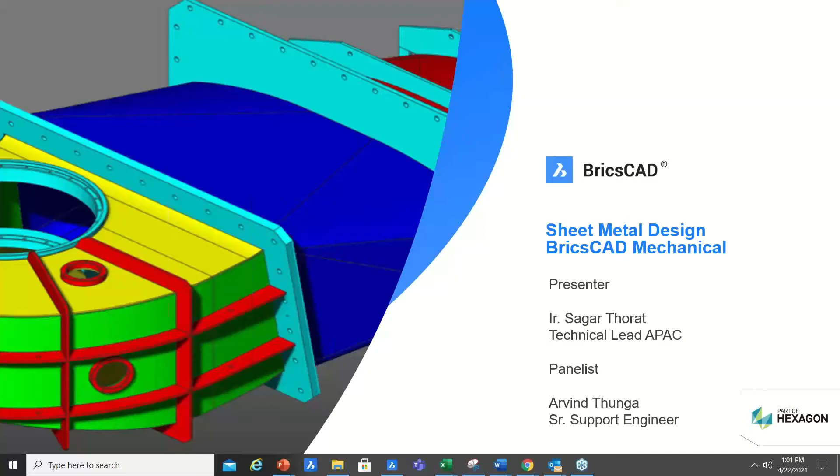To begin with, this is in general the agenda for BricsCAD Mechanical, and our topic today would be sheet metal design, and we would just take a quick look at how sheet metal design fits into the entire mechanical workflow.

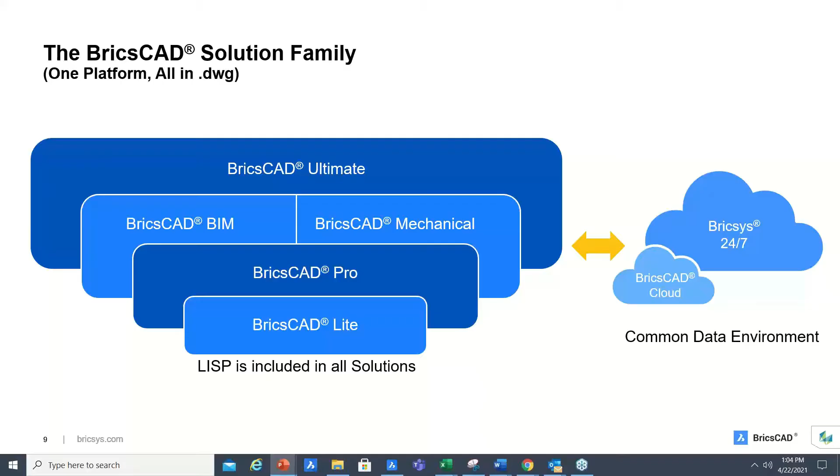The BricsCAD solution family starts from the basics of 2D and takes you all the way to BricsCAD Ultimate, which is a fully functional vertical solution for AEC and manufacturing industries. And today our topic will be BricsCAD Pro and Mechanical combined for sheet metal design.

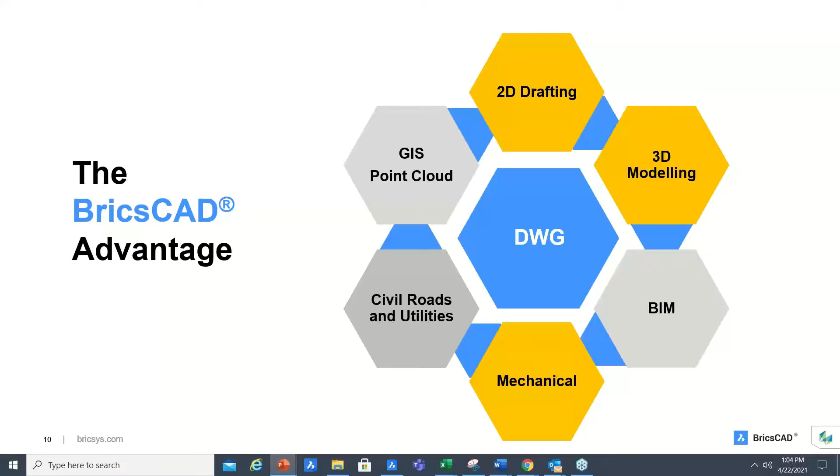What is the BricsCAD advantage? BricsCAD offers you a one-stop solution for all your design needs, starting from 2D drafting, 3D modeling, and mechanical design. Our manufacturing solutions for product design and manufacturers are part of an entire ecosystem which facilitates industry collaboration and high-level design functionalities for manufacturing and mechanical industries.

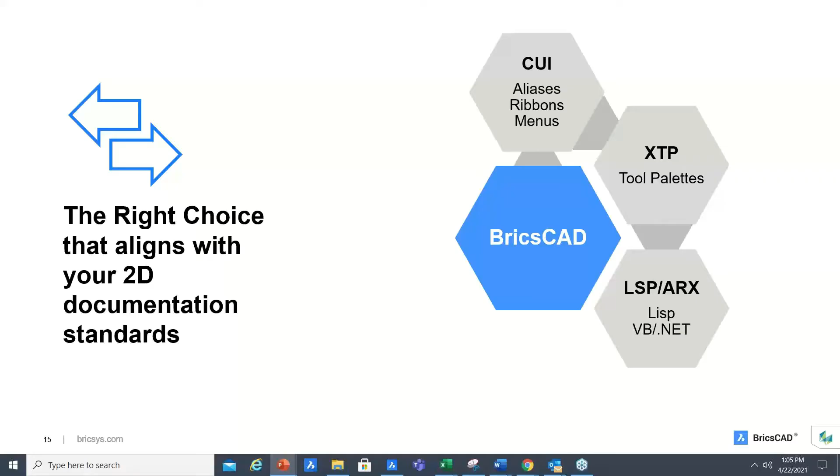BricsCAD is the right choice that aligns with your 2D drawing and documentation standards. Over the years you have developed your CUIs, XTP files, Lisp routines, ARX routines, VB.NET scripts, your sheet sets, DWG, DWT files, plotter setups; all that you know on your current DWG platform can be directly utilized inside BricsCAD.

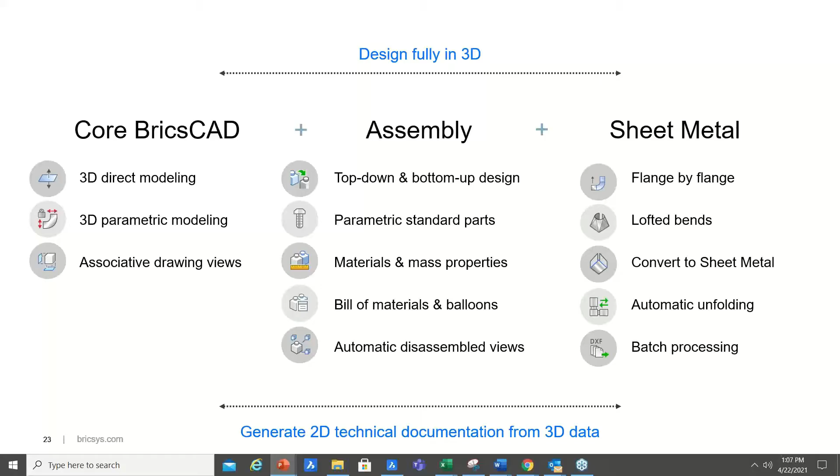So design fully in 3D using BricsCAD and generate 2D technical documentation from 3D data. Create sheet metal part designs that are resilient. BricsCAD is free of the conceptual errors that plague history-based MCAD modeling systems. Your designs can be modified without the worry of failure because we combine the freedom of direct modeling with the power of feature-based design.

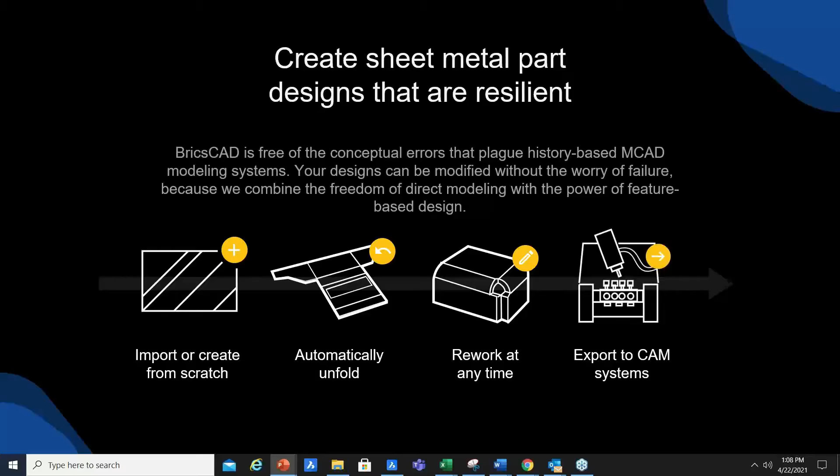So we will begin today and explain to you in the software how you can start creating a very simple sheet metal from scratch, doing automatic unfolding and exporting it to DXF. Some of the features we'll be discussing are analytical unfolding, automatic junctions, bevels, tabs, thickness per body, tabs on curve, and bend radius. These are some of the features that have been launched in the V21 version of BricsCAD. So I would directly like to take you to the software interface now.

So this is BricsCAD. Users who are used to a CAD-based environment would be easily able to adapt to BricsCAD, as BricsCAD saves everything in DWG format, right from the 2000 version all the way to the 18 and the 20 versions.

And BricsCAD also imports multiple file formats and models right from DWG to Rhino, SketchUp, IGS, STEP files, SolidWorks, Parasolid, Creo, Inventor. Files can directly be opened inside BricsCAD for further modification and design.

And you can also export your models as Collada, stereolithography for 3D printing, SVG, IGS, STEP, CATIA, IFC, and of course DWG and DXF is a standard save as.

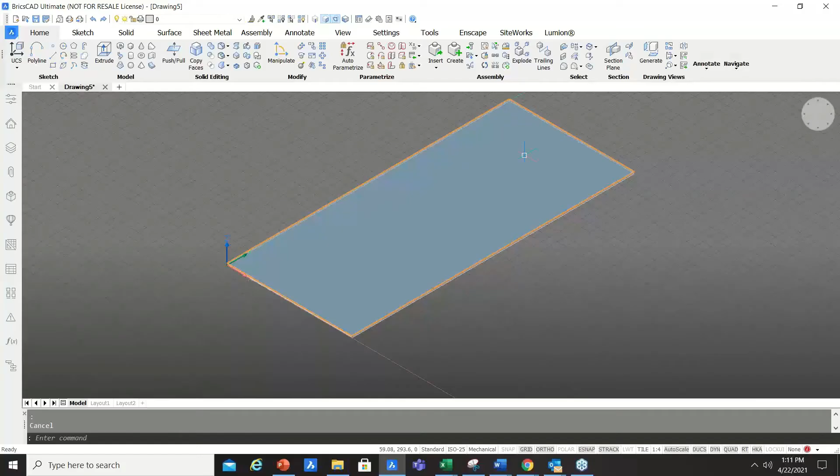Let's say if I accept this, your base flange gets created, and immediately your mechanical browser gets activated where this base flange is identified as a unique body. Okay. So we can start by pulling these edges. For example, I could first hide this polyline. So I can directly go here and hide the polyline here that was used to create the base flange.

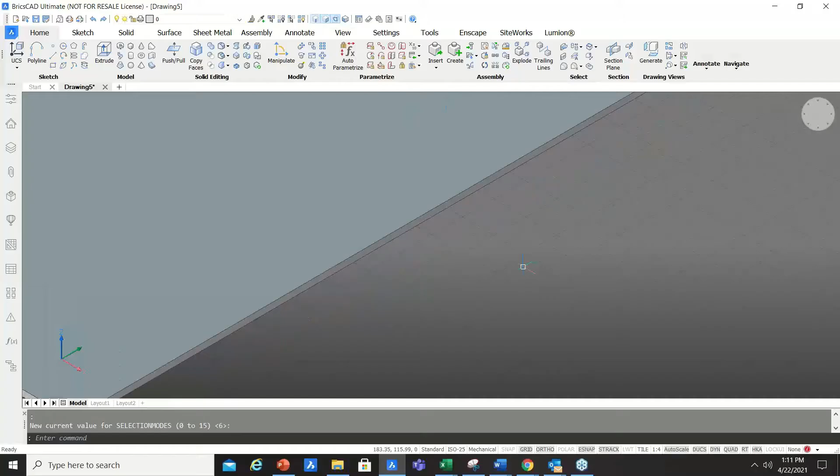And then we can highlight this edge, and directly my quad cursor will allow me to convert this to a standard flange. For example, in this case, I will simply move this to 30, and the angle I can define. If I want to have another angle, I could do that, or simply keep it at 90, and my bend will be automatically calculated because of the formula inside.

Then we can use this top edge to create another flange, and we could actually define create flange with width as such, and you'll be able to define an offset distance like this, for example, or you can press tab and you're able to use the dynamic dimensions to define the longer length or the shorter length of the flange. For example, over here, we can now say 30, like that.

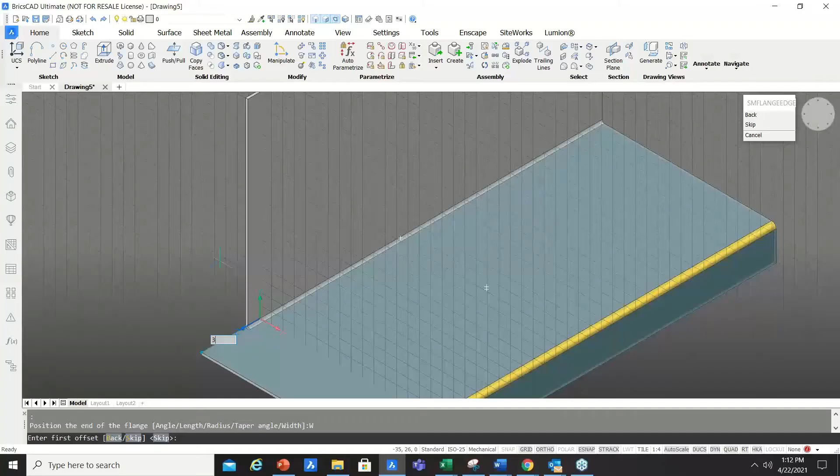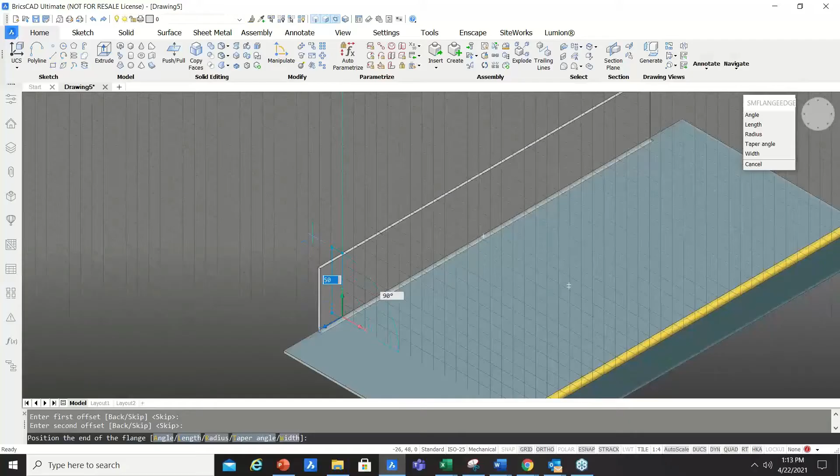And on the other side, we can also define a particular distance. So this is how you could also create a flange on the other side. So let's say even on the other side, I want the distance of 30, whereas the length I actually want is roughly about 65, for example. Okay. And there you go.

All right. So now we'll look into, for example, if I have this solid face over here, I could switch the relief pattern. For example, we can switch to a round relief, and you can see that this round relief will be visible over here. And you could also change the relief back to a smooth relief if you would like. So depending on what you would like, you can use different relief patterns. For example, you can switch to a rectangular relief pattern, which we will stick to.

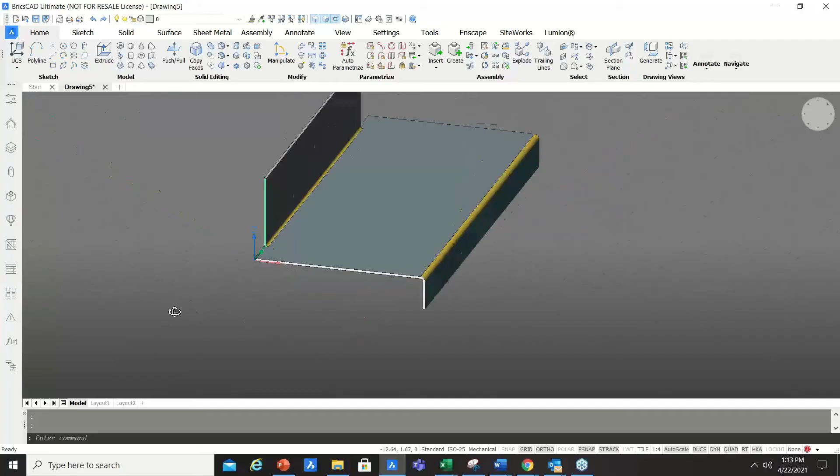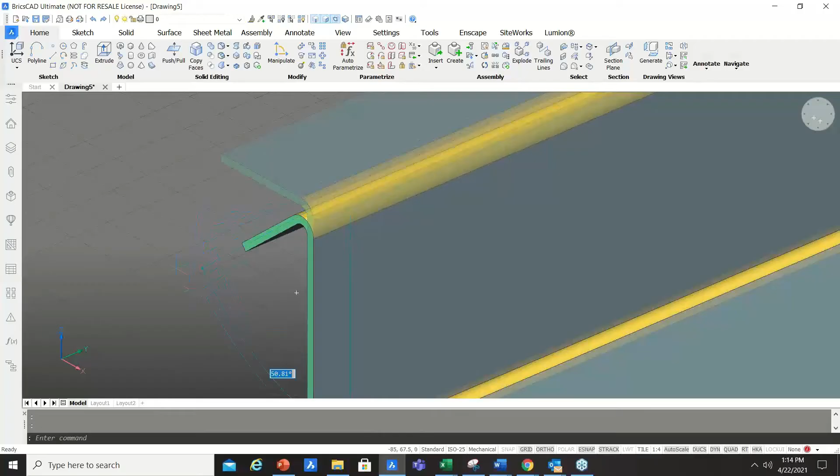All right. So then we will use this edge to create another flange and use 30 mm as our distance. Okay. And now you could actually click on this particular surface, and over here, you can see the quad cursor will give you various options. In this case, we will use the rotate flange option. In the rotate flange option, you can post-modify your flange, and you can define what angle you would like to have. Okay.

Similarly, now if I decide to make a change, I could also use the direct modeling functionality of push-pull. For example, over here, I can directly push-pull behind by 60, and dynamically my design will update. Okay.

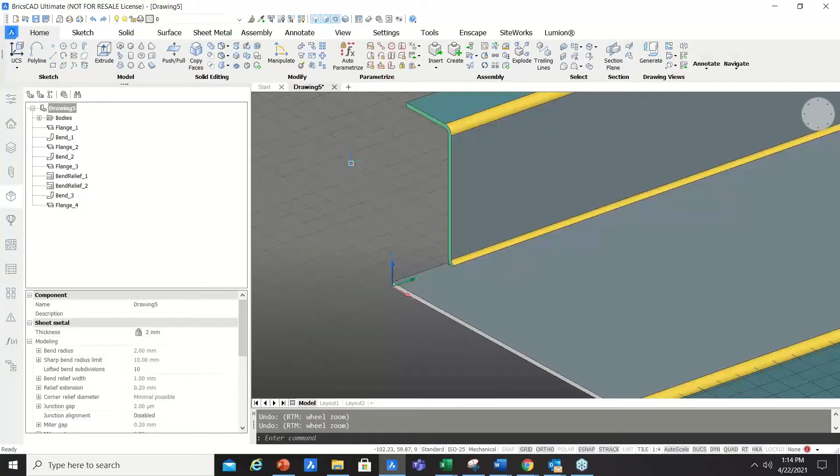All right. So now all these changes that we're doing, these flanges that we're making, are directly recorded inside the mechanical browser. And after this, if I decide that I want to change the thickness of my sheet metal, I could go to changing the entire sheet metal thickness from 2 mm to, let's say, 5 mm, for example. And you can see this automatically getting updated.

Okay. The other properties that you could change inside the properties mechanical browser dialog box is, for example, defining the type of bend radius calculation you would like to have.

Would you like to have it as an absolute value or a thickness ratio? In this case, we can keep the thickness ratio of 1, or I could change it, for example, to 2. So you can say that my bending radius will automatically get updated based upon the thickness ratio. Normally, 1.5 is quite standard in the industry, so we could stick to 1.5.

We could also look at the bend relief. For example, you can define if the bend relief has to be absolute value or a thickness ratio. Similarly, you could also define a K factor, hem relative bend deduction. These are all the functionalities, the editabilities inside the properties that you can do in the mechanical browser.

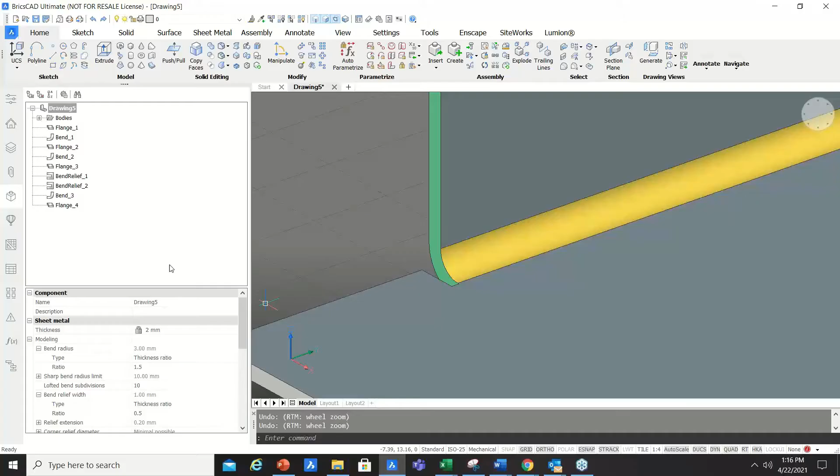Also, you could select it feature by feature. For example, the bend relief, flange 4, flange number 2 can individually be selected. Now let's look at editing this flange and this flange together.

So we have selected this flange, and what we would like to do is actually use the feature. Either I can match the length over here, or I can change the length. For example, let's change this to 60. And again, the angle can be adapted.

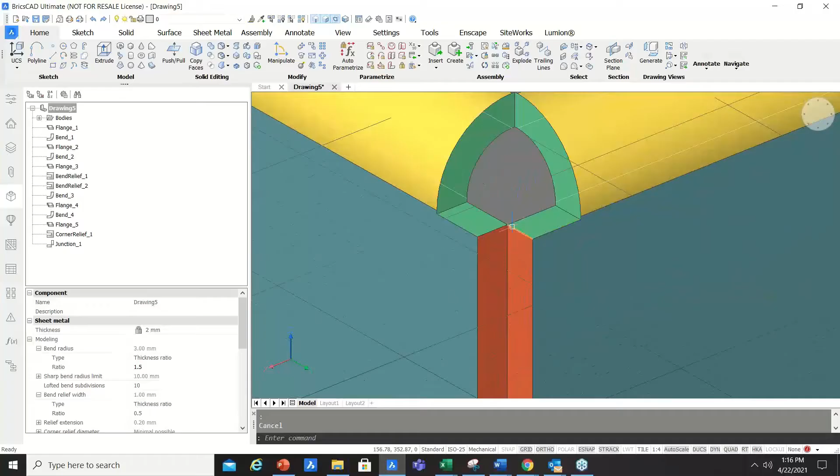Over here, you can see that the reliefs are created, the junction, and we can go to this particular face, and the quad cursor will give me the relevant functionalities. Like in this case, I would like to switch the junction and have it made like that, overlapping each other.

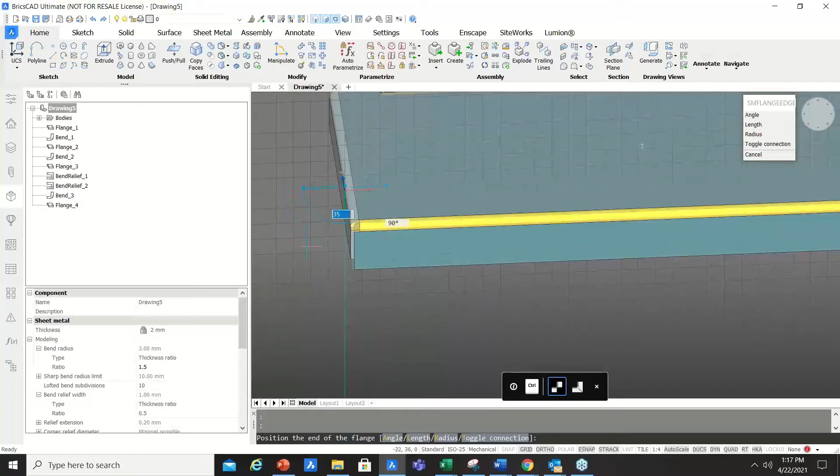So we can actually do this on both sides. We can select this line here, select this line here, and we could directly give the same behavior for both the flanges together. So let's choose a length of 60, and the angle we can stick to the same, right? Then do the same on this edge over here, and we'll do it on this edge over here.

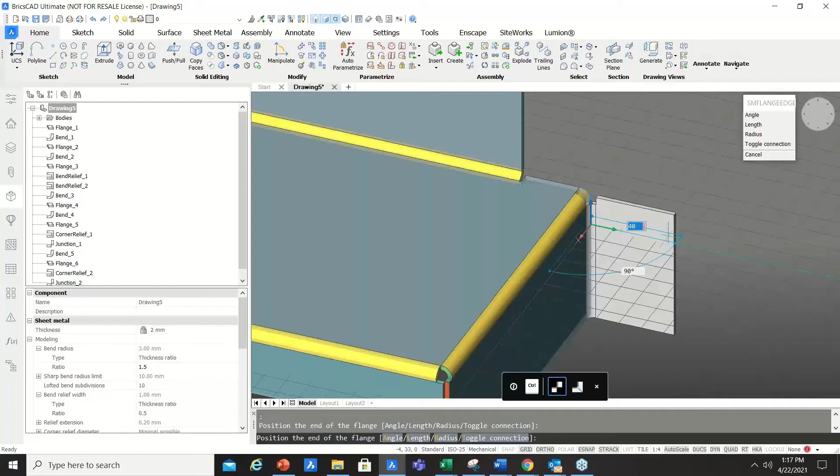And then choose another flange. Let's say in this case we will use 40 as this edge over here. Okay, there you go. So both flanges will be simultaneously created.

Now what we can do here is continue building our sheet metal design. For example, let's say you want to hook this or slot it onto a particular element or component. We can have slotted holes.

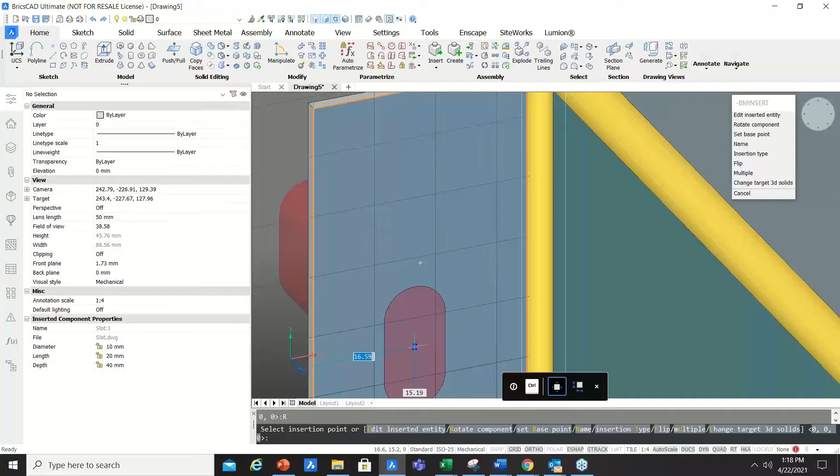So we could actually go to our hole library, so standard parts, and inside sheet metal library you'll find form features, for example, or you can also directly go to holes. Inside holes, you can use a slotted hole, and you can directly place it right in the middle here. And below you can see the command line. You can actually rotate this, and then position it in the center over here.

Okay, so once you position this, you could also now edit this particular slotted hole. The properties of this slotted hole can directly be edited. For example, the diameter, instead of 10, I could make it 15. But in this case, we'll just stick to a smaller diameter, 8, for example. And the length, we could make it 40.

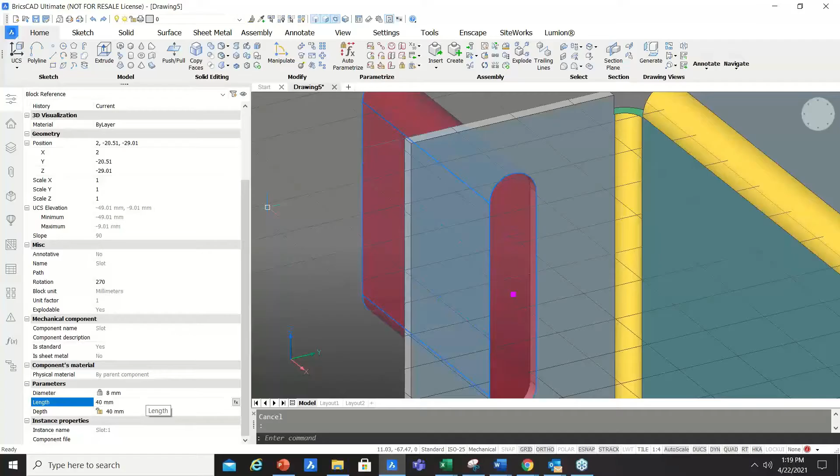Okay, and there you go. We have a slotted hole now, which is sufficient enough for us. And the depth, perhaps we just reduce down to 10 so that our slotted hole doesn't project too much outside. And then I can mirror this slotted hole on the other side.

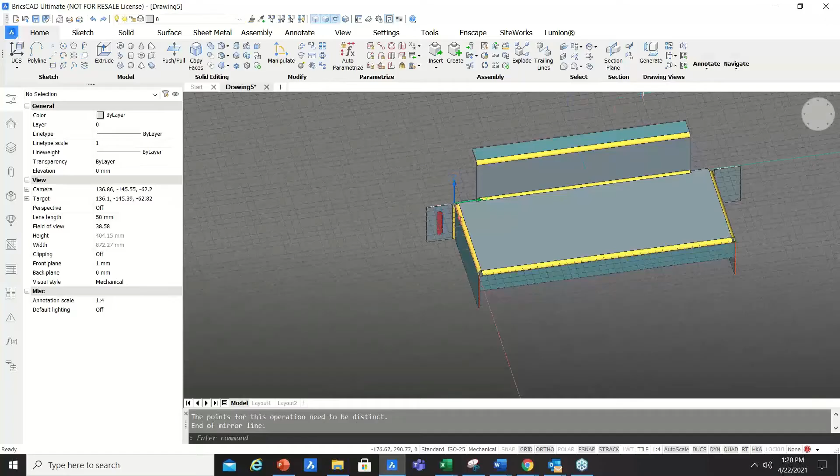So I could actually switch to the back view, okay, like that. Very easy, the view cube can be used to switch on the back view. And you could now mirror this by simply typing MI for mirror, and just use a midpoint over here, for example, like that. And then enter. Okay, there you go, just switch it off.

Let's choose the mirror direction, for example. Okay, and then we have mirrored this on the other side as well, and the slotted hole has been transferred automatically.

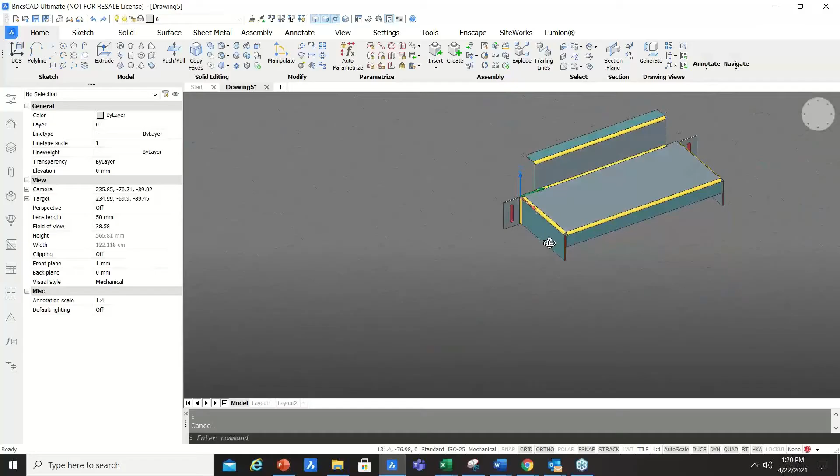Now let's add some punching holes on top of this, for example, over here. So for that purpose, we will simply insert, and we are going to insert a 2D drawing. We will insert the holes 2D file, which is just a 2D DWG file.

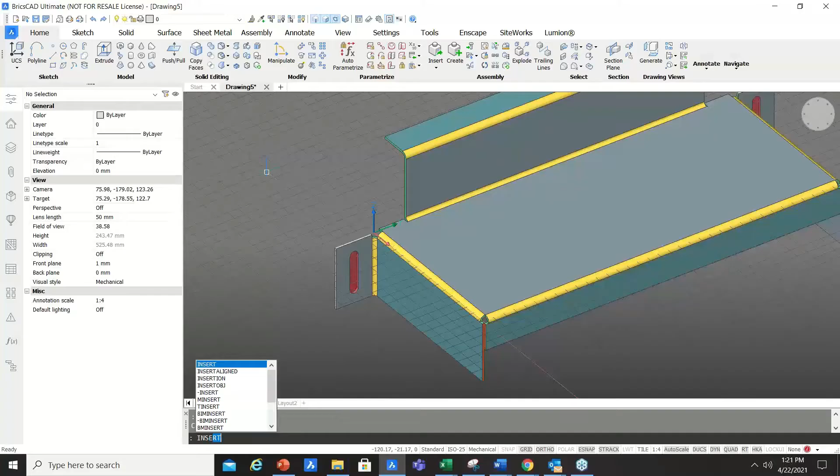You can open it, and then insert, and the insertion point could be specified on the screen. Just bring it in here, and we could just place it on this face, for example. So I'm just going to rotate this, for example. Okay, just UCS world. Let's keep the UCS down and insert it again. Let's insert the file again, just insert it.

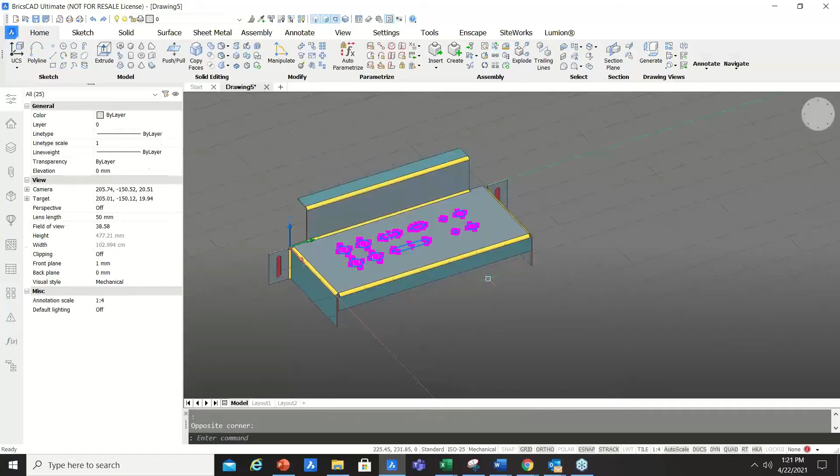Okay, here we go, so we can just position it like that. There we go, so we have these punching holes. You could select all of these holes. For example, this is simply 2D line work, and we could simply extrude these and cut a hole in our sheet metal. There you go, so this is your hole in the sheet metal.

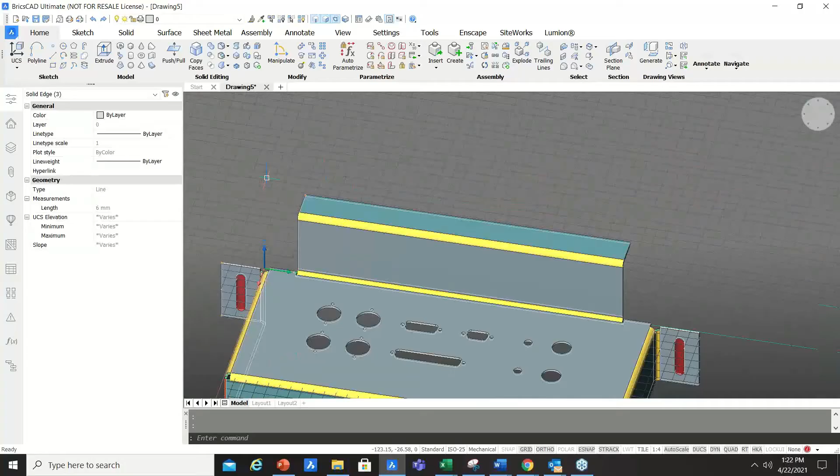Now what we can do further is explore the chamfering features. For example, we're just going to use these edges, all the edges, we can select them. Just select the edges over here, this one, okay, and we could also select this one, and select this edge and this edge, okay.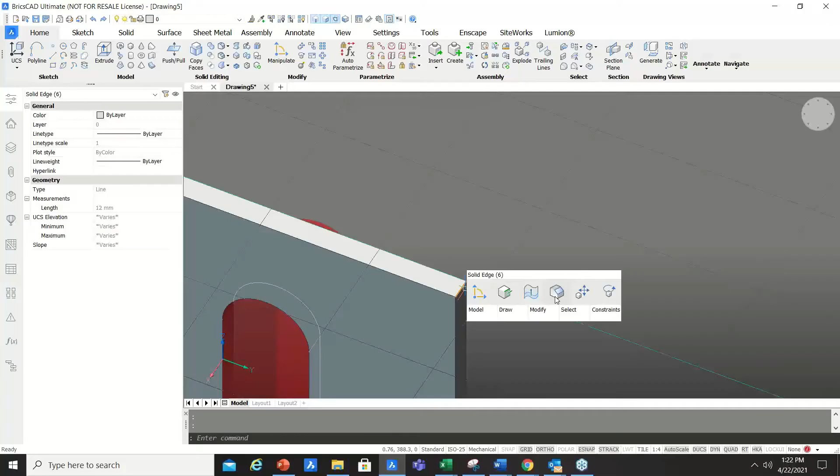And here, for example, now you can see that the quad cursor will automatically enable the chamfer feature. This is the machine learning inside BricsCAD, which reads the user behavior and the functionality you're using. It understands that it's a sheet metal and you are now looking at chamfering, so it'll automatically give you an option of chamfering. After that, you can choose to use the chamfering feature and just give a chamfer value of 5, and the chamfer will automatically get created on all the edges you identified.

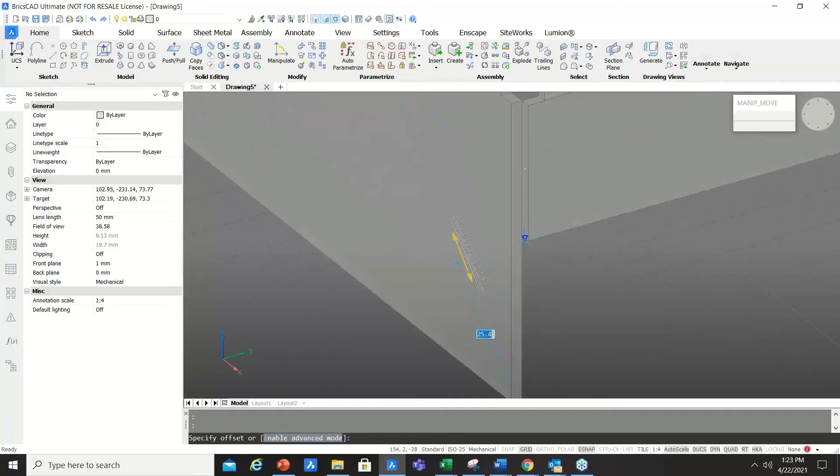We can choose this edge and the same chamfer will appear. The quad cursor will understand that you have actually instructed in the previous command that you would have to do a chamfer, and in this case we will also initiate a chamfer of 25.

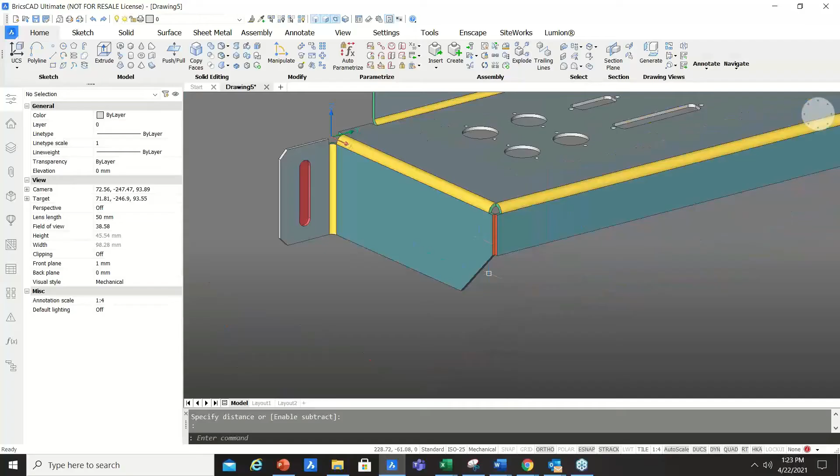Then, further to modify this chamfer, what you could do is select this surface and simply use the push-pull to match the edge over here. And there you go, beautifully you can just create this edge like that. And after that, you could now switch the junction type and lock or close this connection like that. There you go, so this was sheet metal from scratch.

If you would like to add some form features in this, please feel free to do so, we will explore it in another option. Now after this, let's say I'm happy with this design and I would like to test it out, or directly go and cut it out into a CNC machine. So what I would do is unfold it, or I can directly export to DXF, or I can create an associative unfold, where you will be able to see the behavior immediately.

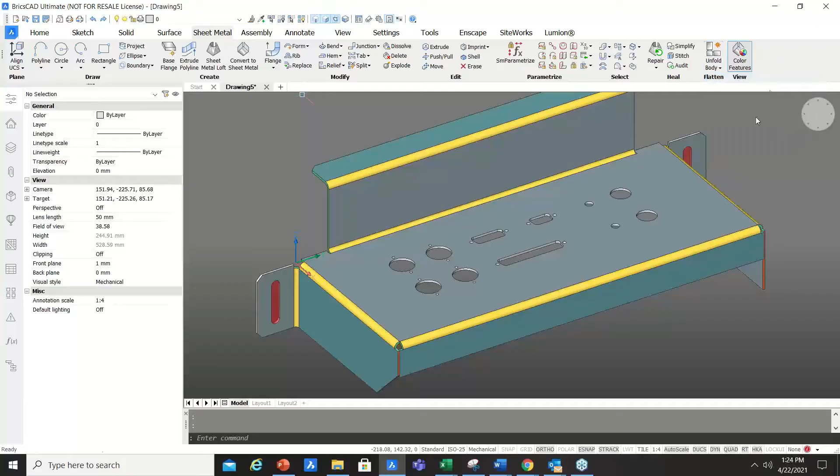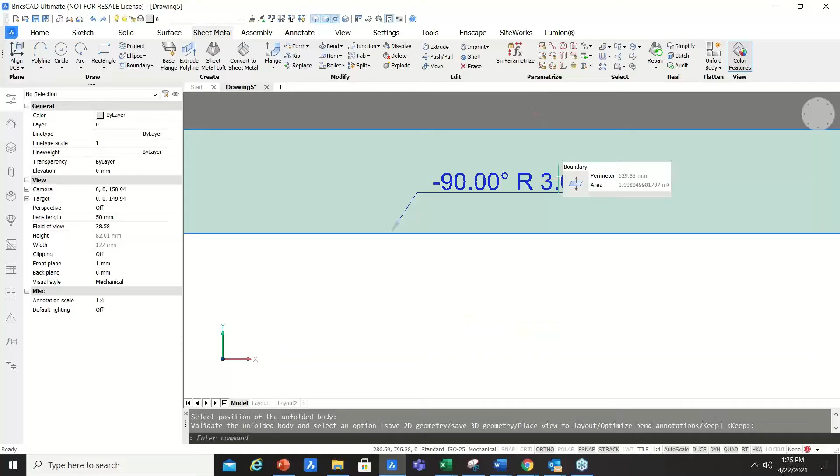So I can unfold, simply select the face, and there you go, I can unfold it directly over here. My unfolding pattern will be created directly, and it will give you the dimensions and also the annotations for the bend and how much degree of bend, and what is the bending radius associated with the degree, which your CNC machine will be able to read.

Now, the important thing is that you can export to DXF directly. So you could select this particular sheet metal and directly export as a DXF. And over here, you can see immediately that at my fingertips I'm able to get the area and the perimeter of that particular piece or part of the sheet metal. And here, now you can directly send this to your CNC machine.

If you would like to control the settings of your export of the sheet metal, then in your settings you can go to sheet metal and the feature colors can be identified, for example, and what are the other commands, let's say for assembly export, so all these colors can directly also be checked.

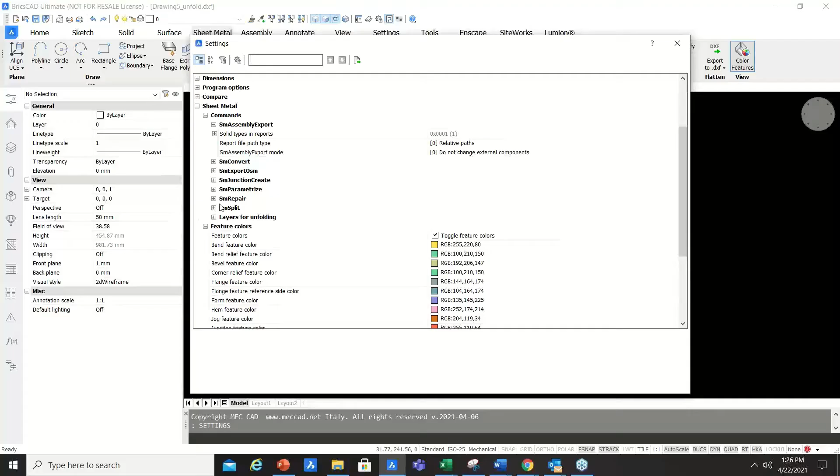Layers for unfolding, for example, what is your target CAM? You could actually insert a particular value over here or an extension. The contour layer color you can change, the bend lines color you can change, the bend line down layer, overall dimension, bevel features - what color you would like to show bevels as, form features - how would you like to represent them. However your CAM system is going to read it, you can set this up for export. Similarly, your DXF exports, you can also change the factors of accuracy and minimal edge length - these can also be changed.

So that was unfold. Now let's say you have a solid model, something like that, and how you can convert it. Let's say you just receive a solid model like this, like a block model, and this is what you're now going to convert into a sheet metal.

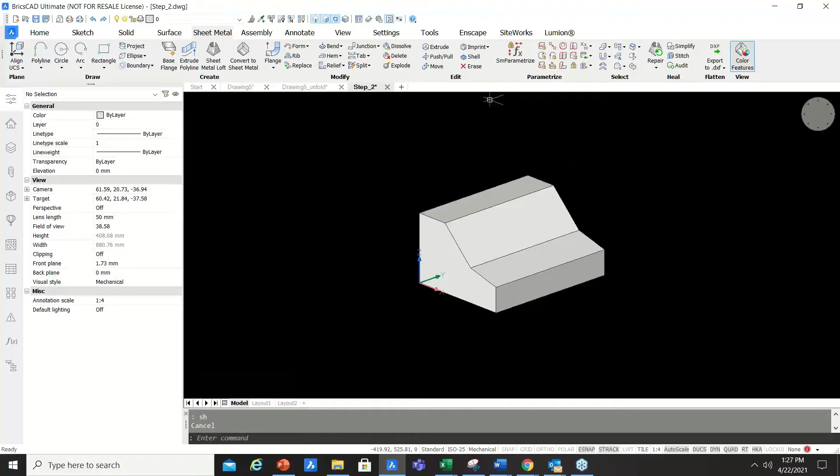So for that purpose, what we can do now is simply use the shell command. The shell command enables me to create a shell out of this solid, and you can just give a thickness as a shell offset, and that's it.

So for example, now you have a shell. This shell you can convert to sheet metal. Just use this command, choose this face, enter, and there you go. My entire sheet metal will begin over here. So a simple 3D solid that you just made by push, pull, and extrude modeling could be converted.

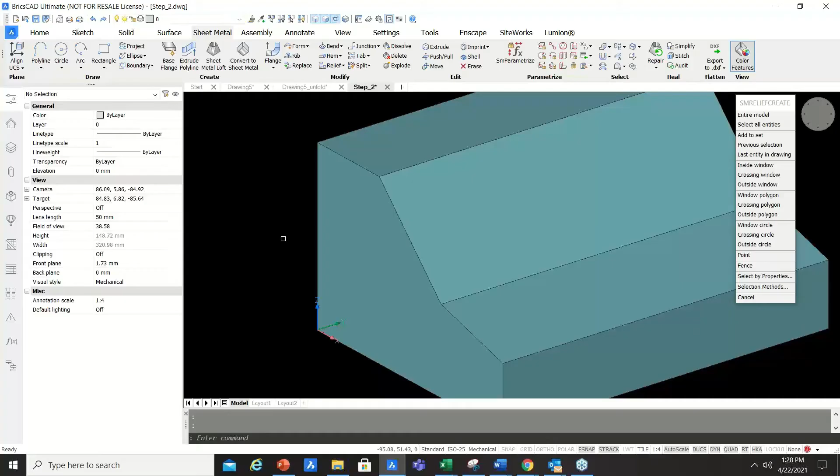Then we could directly start by adding reliefs. For example, I could create reliefs in the entire model, and there you go. I have my reliefs over here, for example.

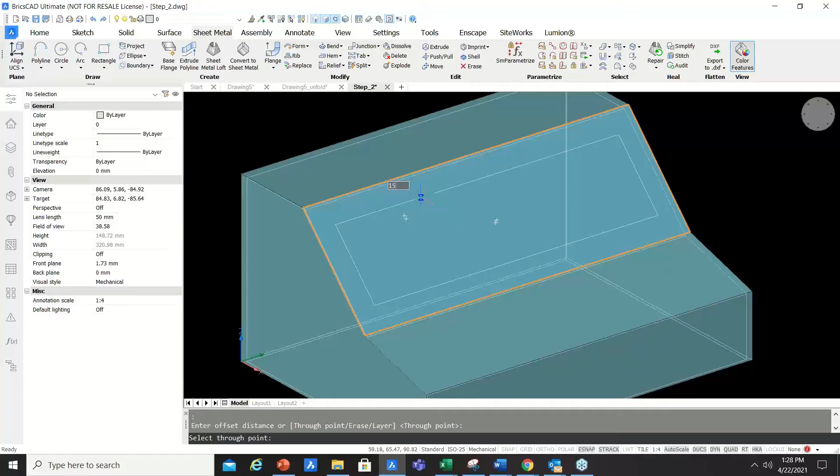So just before the reliefs, what we'll do is create a feature where we can edit the sheet metal by adding an offset of, let's say, 15. Then we'd like to remove this portion and create a hole there. Simply extrude back and use a value of 10, and there you go.

So now I have this feature that I would like to add to my sheet metal. Let's say it's a countertop, and here you want to insert a glass or acrylic sheet as part of your digital monitoring system, something like that.

So after that, we can now do the reliefs again, create relief for the entire model. Just press enter, create the reliefs. And further to that, we could start adding junctions.

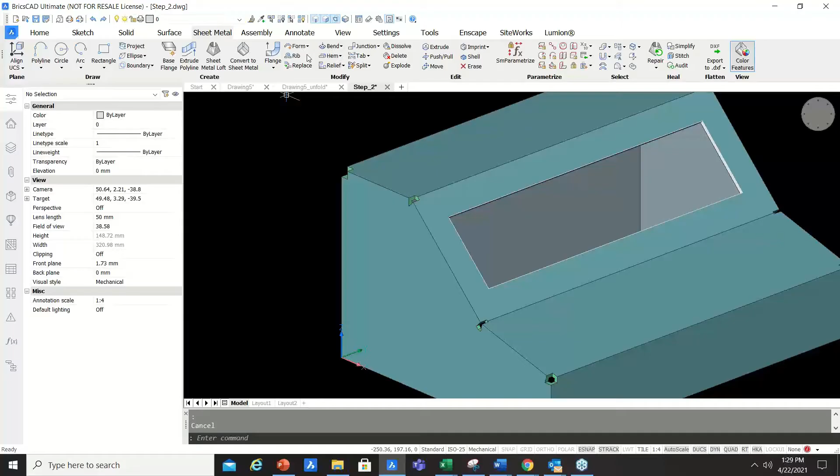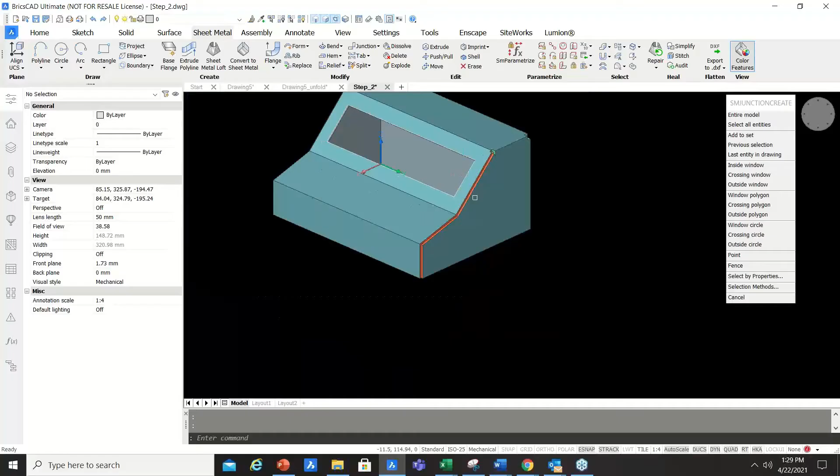So just create a junction. Let's say create a junction here, here, here, and here. Similarly, we can create a junction here, here, here, and here. Reliefs will help us control how our junctions get penetrated into the system, for example.

And after this, we can actually start creating bends. Create a bend here, create a bend here, okay, create a bend here, and create a bend here, for example. There you go, so your bends are ready, right?

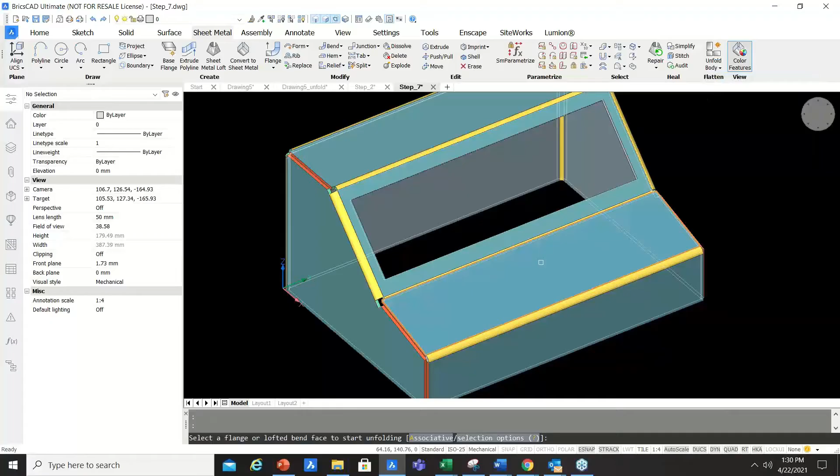And the next thing we can do is, I'll just open this model over here. So after creating the bends, for example, we could now, let's say I want to split this. So let's first unfold it and see what's the size of this unfolding. Just gonna unfold this body, select this particular face, and unfold it.

You see that there is actually a clash, and probably we would have to split this panel into a few pieces. Let's say we would like to split this into two pieces. In this case, what we can use is split by point. So simply split the sheet metal and just select this part to split.

And you could use a machine learning feature inside BricsCAD called propagate to transfer this split to the other corners. So this is AI at its best.

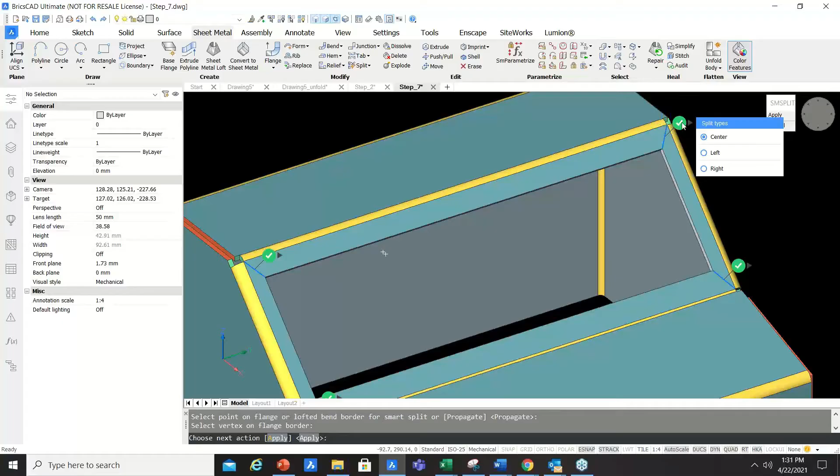So for example, now if I choose this corner, you see that there's a design assist suggestion provided to you: would you like to apply this split on these corners as well? And you have a choice - you can choose to apply in different ways, for example left or right. And you could also choose not to apply here.

Let's say I don't want to apply it here, but I could even apply it afterwards if I decide yes, I want to apply. And after propagating, you simply enter, and your sheet metal has been split into two parts now. So you can see here that there are two bodies.

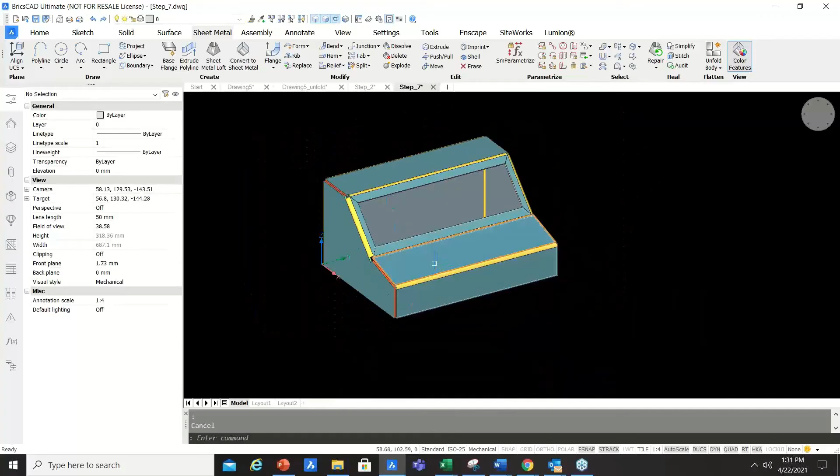So we go to the mechanical browser, okay? And just a second, I think I need to sign out of my Teams. Okay, so we have two bodies over here right now, body 1, for example, and body 2.

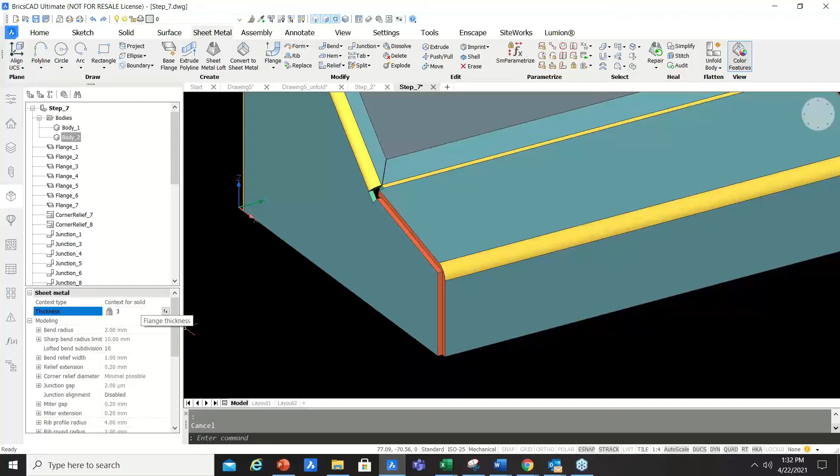So let's say for body 2, I would like to have a different wall thickness, a different thickness for my flanges. So I could go to body 2 and switch it to a solid, a contextual solid thickness, and then edit the thickness from 2 mm to 3 mm.

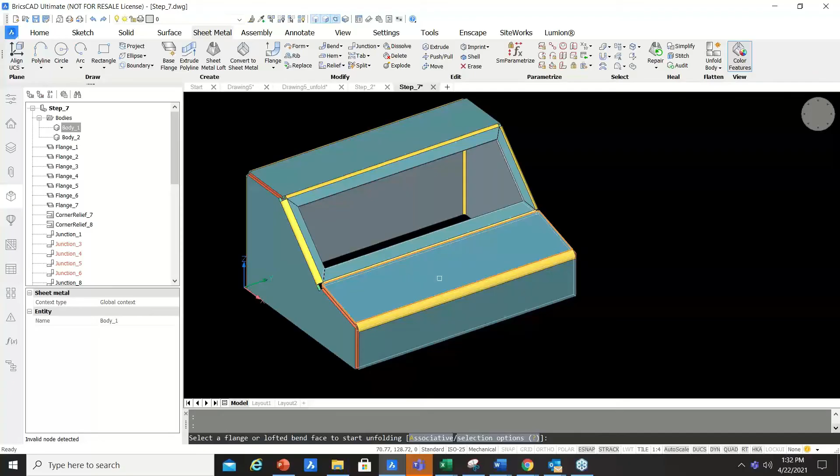And then this particular sheet metal piece, which is another part, will be thicker. You can see here, for example, it's thicker. This one has a different thickness, and that one has a different thickness. So now I could unfold this portion separately, and I could unfold this portion separately as well.

Done, okay. So now I could meet the nesting requirements. For example, you could simply use a rectangle or do manual nesting, or maybe use a free nesting software to check the sizes. So now it's fitting into my particular size and I'm good to go. I could directly export it out to DXF, or batch export and send it to the CAM machine or CNC.

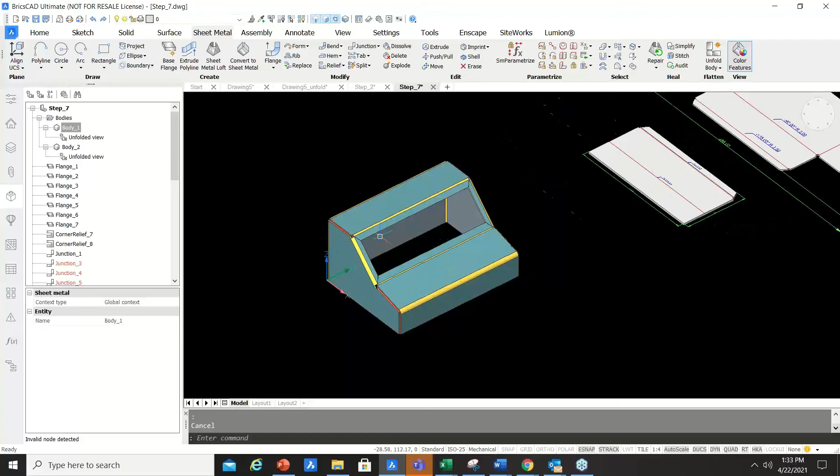Okay, so the next feature that we are going to look at is - alright, so let's actually now start a new drawing again, a new model, which is a mechanical template.

And we would, in this case, be importing a file that was created in SolidWorks. So we're going to import a SolidWorks part file, which is a sheet metal enclosure, which was done for a CPU, or it could be any gadget, for example.

So you can bring in multiple formats, like I mentioned before. You could bring in Solid Edge, SolidWorks, Inventor, Creo, IGS files, STEP files. You can bring them in. Rhino models, SketchUp models, all can be brought inside BricsCAD.

So you could now, let's say, bring in a SolidWorks part, sheet metal enclosure, open it, and give BricsCAD a few seconds to digest the information, and you should receive the model inside. So below you can see we're getting this update bar. Now we are importing the sheet metal inside.

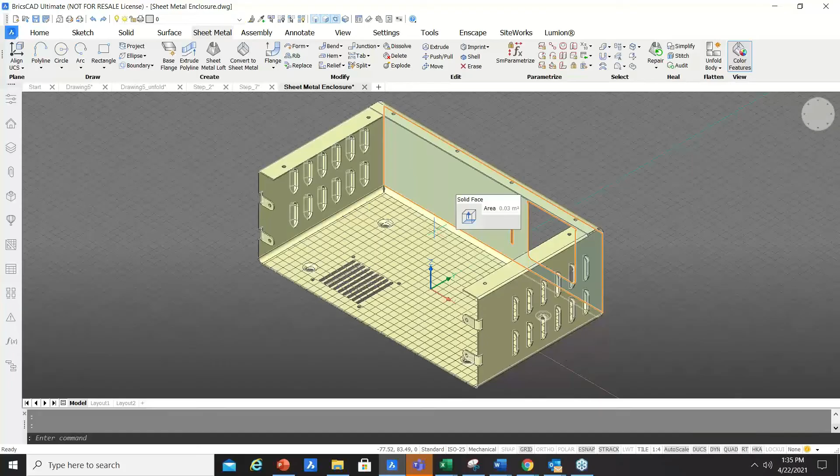Okay, so there you go. My background import has been finished, and I could now open the sheet metal part, which was created in another MCAD software. And here you go. This is now a simple 3D solid. If you go here and check it out, it's just a 3D solid. It's imported as a 3D solid. There is no assembly information.

The material has been captured as alloy steel. The physical properties have also been captured. So the material information has been transferred, the geometrical information has been transferred, and now within BricsCAD, we can beautifully convert this to a sheet metal, right? Convert to sheet metal, just click on one of the surfaces and just choose entire model. BricsCAD will use the 3D geometrical information and intelligently convert it to a sheet metal.

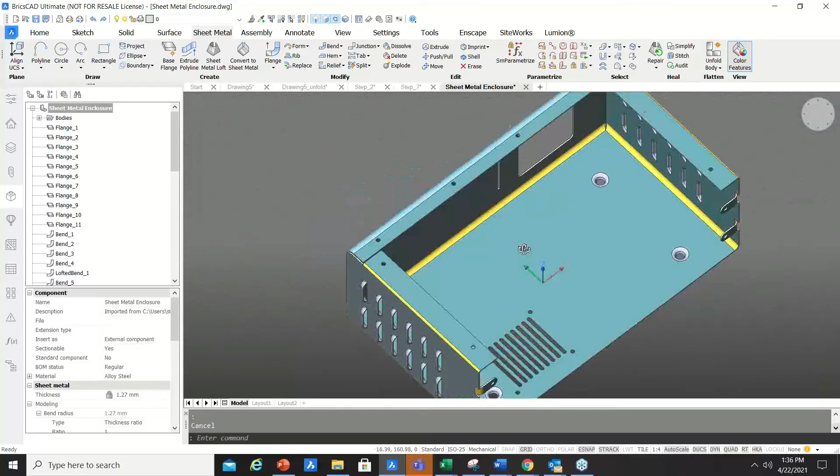There you go. We see that there are some form features, like ventilators, for example, or some other form features which you see here. So let's convert them to native BricsCAD form features. We could simply hover our mouse to that particular form feature, and here we have an option of replace form feature. So replace form feature can be utilized to convert the standard form feature to a BricsCAD form feature,

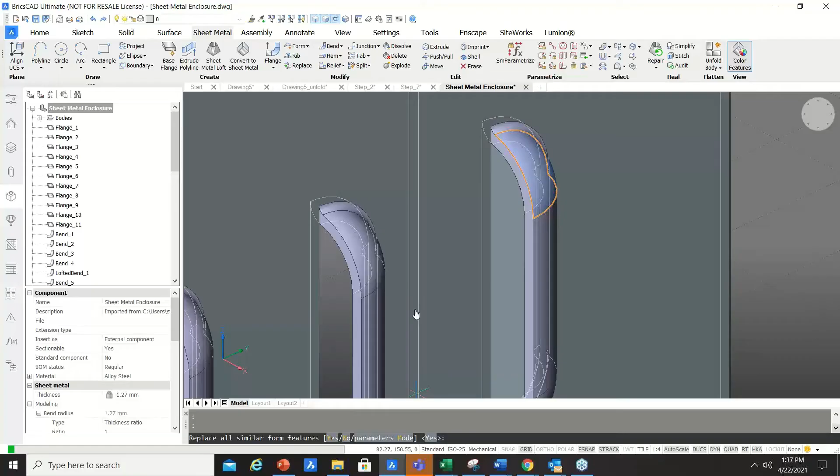such as louver, for example. So just open the louver form feature, and in this case, there's an option below, replace all similar form features. I would select yes, and similar louvers will be identified inside the model, and all of them will be converted to native BricsCAD form features. There you go. This step is important, otherwise you will have some errors when you're doing unfolding. So you have to convert your SolidWorks form features to BricsCAD form features by simply replacing the form feature.

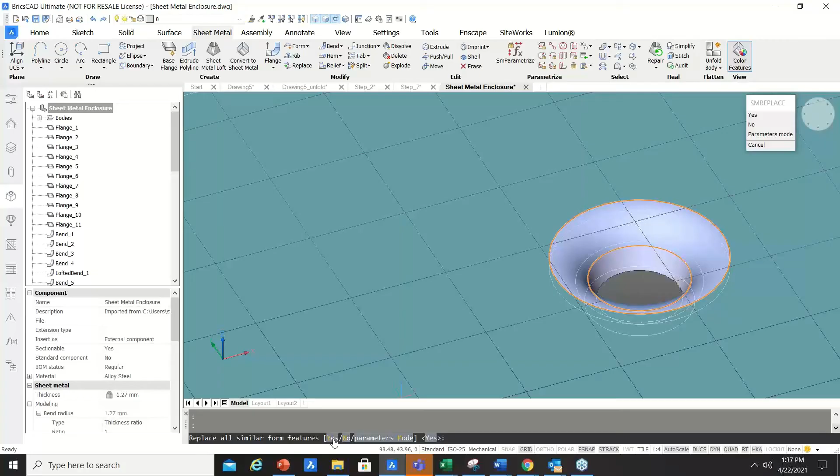In this case, it's an emboss with a hole. Yeah, so this is simply an emboss with a hole. Again, yes, to convert all of them, and there you go. This is now converted to a BricsCAD form feature. Within BricsCAD also we have form features that you can use, or you can create your own form feature.

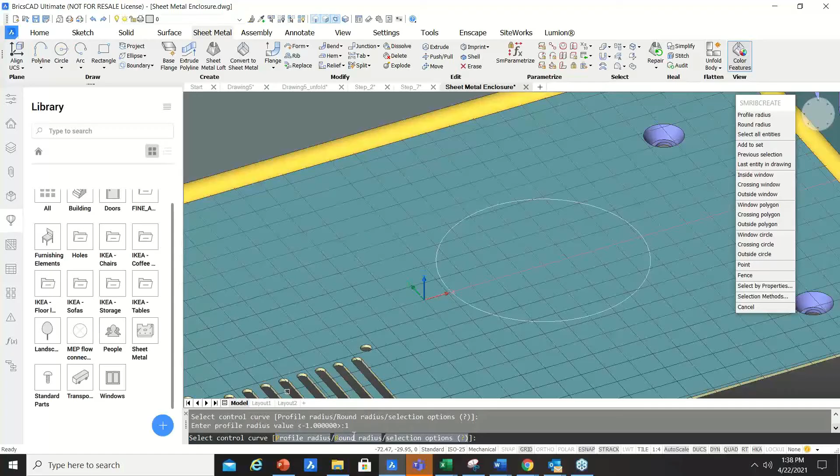For example, if you want to create a rib feature, you could simply go here and let's just create a circle. Just going to create a circle here, 40, okay? And I can create a rib feature, create rib feature, select flange face, select control curve, and I think I need a profile radius, just give a radius of, let's say 1, okay? There you go. And here you have created a rib feature, okay?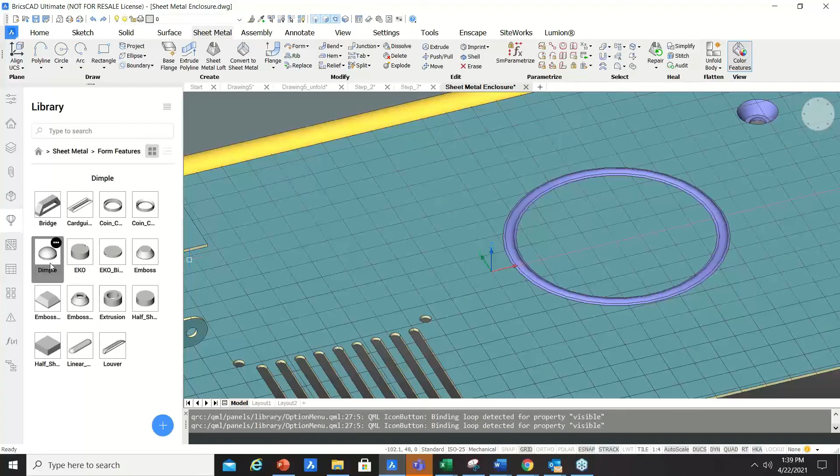So you can create them from scratch, or you could just bring in a standard feature: let's go to sheet metal form features, and you can choose any of these form features, and these are all parametric. So if you want to bring in this dimple or an emboss or a bridge or an emboss like this with a hole, let's just bring in a dimple, for example, and we can place it over here. Just place it here, okay, and it's automatically considered as a form feature, and the rib is also considered as a form feature.

All right, so these are parametric, so you can actually go to the particular form feature by going to the mechanical browser, and you will find all of them here. You can see this dimple, even the emboss, you see the values over here, the parameters. You could go to the dimple, and for example, over here, the diameter I can change from 8.89 to 12, for example. There you go.

Or let's use a bigger value, 18, and it should automatically change. And we can go back to 9 if you would like to. So all these are parametric, and they're automatically connected to your sheet metal parametrically. Okay, so now we can do the unfolding for this sheet metal part. There you go. Your unfolding is here.

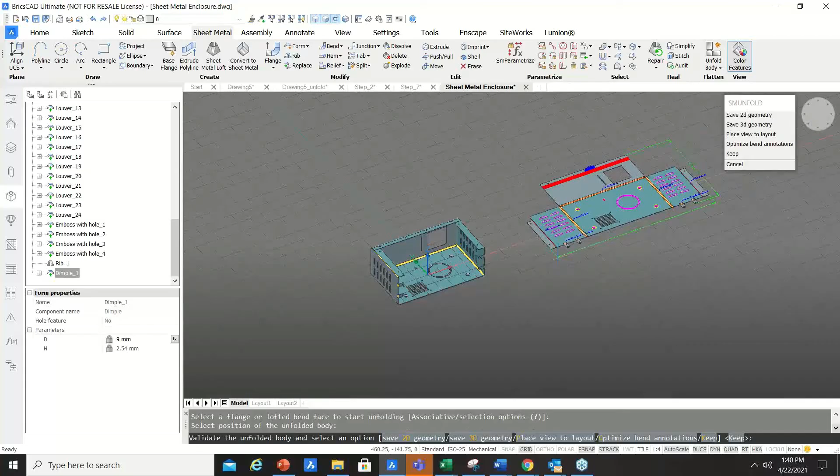Keep, enter, and you're ready to go to fabricate this part. That's it. Or you can export as a DXF.

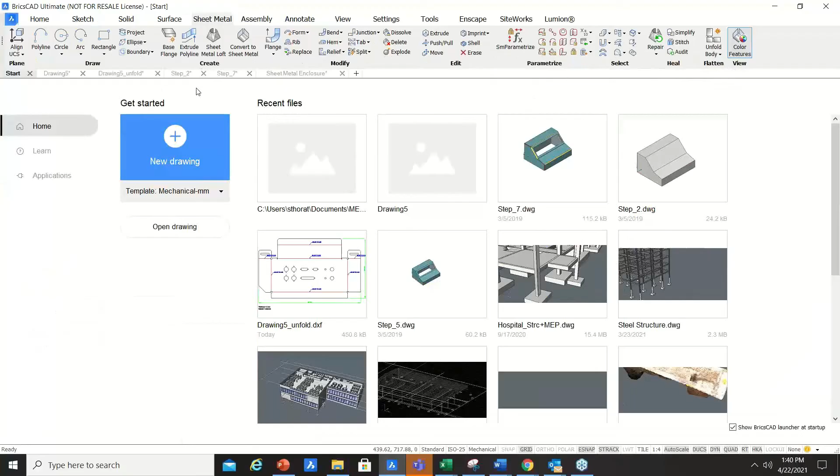All right. So one or two more things that I would like to show you guys is lofted sheet metal. So lofted sheet metal is also a nice feature, and tabs, right? Two features. We'll show you tabs and lofted sheet metal. So let's say you have a rectangle. Just draw it any size you want, for example, 190 by 200, okay?

And you have a circle that's maybe 100 radius. 100 is a bit too much. We can reduce it a bit, make it a bit smaller. There you go. And simply move it up here by 200. There you go. And now we will use the sheet metal loft. So let's go to sheet metal loft.

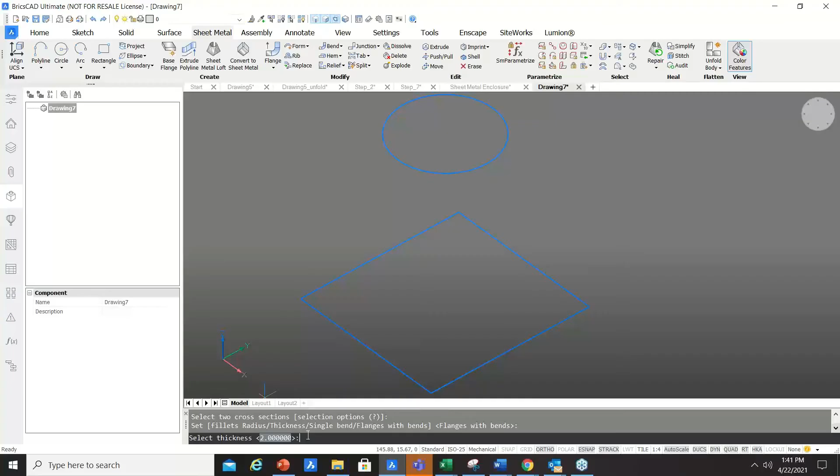Click on the curved bottom, the rectangle, and click on the circle here and give it a particular thickness. So what's the thickness? Let's check. It's 2 mm. Maybe I want to change it to 3. Okay, and there you go. You have your sheet metal part. And from this, I could now go to the body here and change the thickness from 3. If you want to make it 5, you can make it 5 and change it also.

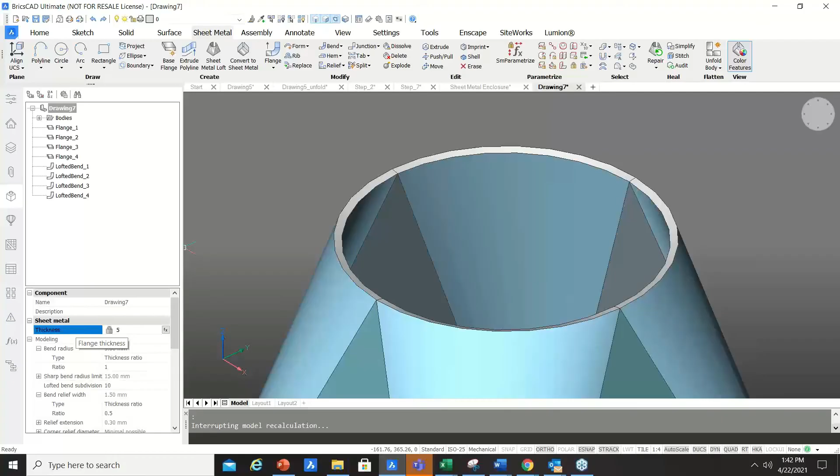All right, so we have discussed these features, and now we can also look at a tab functionality, or let's do it this way. We create a rectangle over here, for example. And then we can use the base flange feature to simply create a base flange like that. We will choose the top curve, enter, and your base flange is ready.

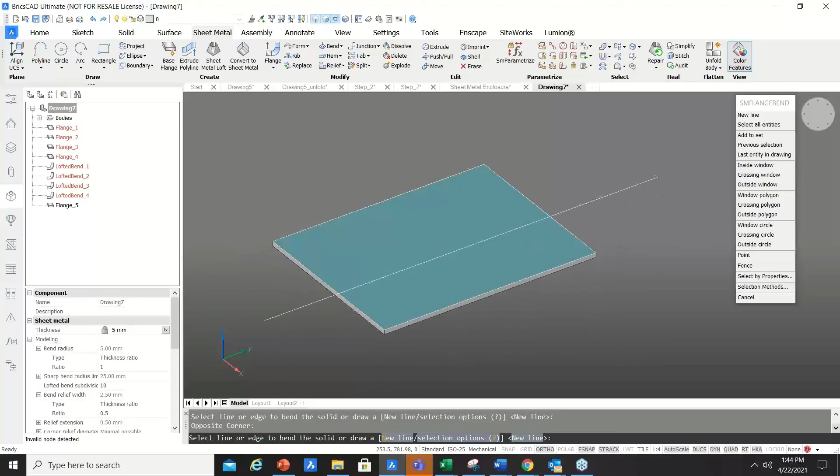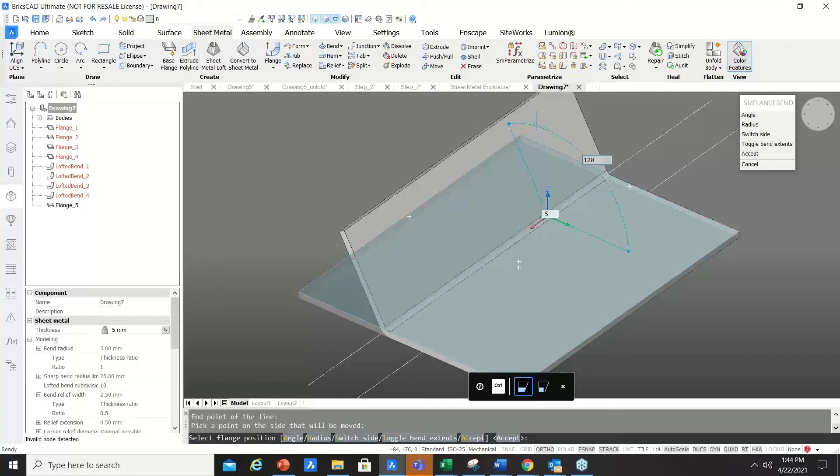And let's say now I use the bend feature. So let's use the flange bend feature, and we select the face. This flange bend side. Maybe we just draw a new line. Okay, and there you go. I can now use that line as a guide to follow my bend over here. And then let's choose an angle of 120, or let's just go to 90 because we want to show the tab feature. And there you go.

So for the tab feature, we can now convert this particular bend. First, I'm just going to hide this, and we can convert this bend to a junction. So just select this and we convert it to a junction. After we convert it to a junction, we can now use the tab feature, create array tab, and just select this face, and you have an array tab over here.

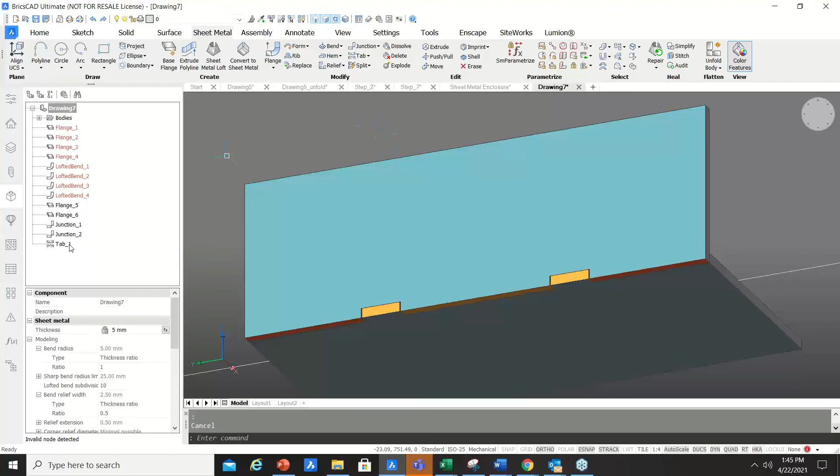We just press enter, and then we can go to the tab over here, and below you see the tab properties. So the number of slots we can change from 2 to 4, for example. Let's just change this to 4. And if you want to change the distance, we could also do that as well. So over here we have other options as well.

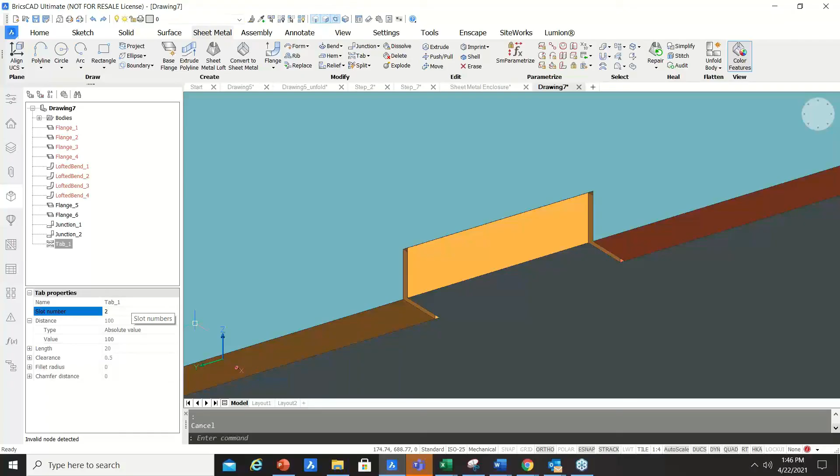So there are other features. Feel free to explore the sheet metal inside BricsCAD. I think I've covered almost all of the features.